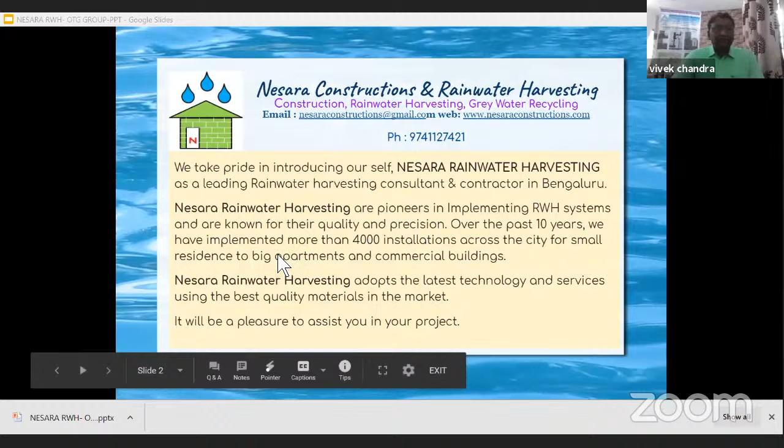So let me get on to today's topic. First, I would like to talk about the relevance of rainwater harvesting in an urban scenario. Why we need to do rainwater harvesting? As we all know, rainwater is the primary source of all secondary sources of water like river, lake, borewell, and municipal supply. Of late, people are using precious treated fresh water and groundwater for irrigation purpose, industrial purpose, and drinking purpose.

Because of this over-dependence on fresh water and over-exploitation of groundwater, day by day, the groundwater source is depleting and quality of water is deteriorating. For example, as we go for deeper borewells, the water contains salinity, fluoride, which is not suitable for potable purpose and irrigation. So fresh water sources are drying up fast as our requirements are outstripping our availability. This has increased the cost of water as well.

Many housing, office complexes, and industries are reeling under a lack of fresh water resources as borewells have dried up and municipal supply is not sufficient. And one more major cause is increasing concretization, reduction in green cover in urban areas, and polluting the natural water bodies are creating more surface rainwater.

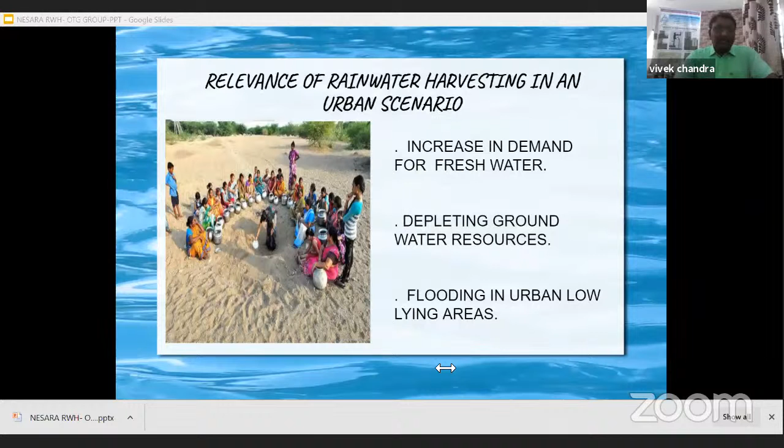So let me get on to the benefits of rainwater harvesting. The first and foremost benefit is rainwater is free. The only cost incurred is for collection and reuse, thereby reducing the utility bills. It is a decentralized source, unlike your supply water or borewell water where government agencies collect taxes. Rainwater is a sustainable resource. We will be less dependent on supply water and groundwater in case of harvesting the rainwater.

And rainwater is free of hardness. This helps in reducing the scaling and need of a softener. It has a nearly neutral pH. And rainwater is superior for landscape irrigation as well as bathing purpose. By harvesting rainwater, we are reducing the flow to stormwater drain, which avoids unnecessary flooding.

Rainwater harvesting through groundwater recharging increases the water table and gives saturated soil condition for the plants and trees in the surrounding. There is no valid myth involved in using rainwater for domestic potable purpose. It can be very much used for all purpose like any other water source with necessary precautions.

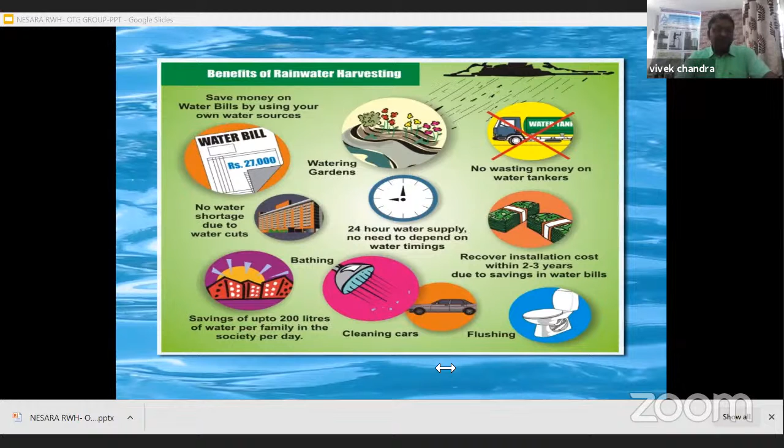So let's go on to the types of rainwater harvesting. Broadly, we can have 4 types of rainwater harvesting, even though many experts do harvest the rainwater in different ways. So the first and foremost is rainwater harvesting for reutilization. This is from rooftop, wherein rainwater falling on the building rooftop can be collected and reused.

The second one is rooftop rainwater harvesting for direct recharging of borewell. Here, the rainwater falling on the rooftop is collected, filtered, and injected to the borewell casing pipe with certain conditions. These 2 types are most adaptable and more beneficial for urban areas.

The third one is groundwater recharging, which can be a good option for surface runoff and can be done in a community environment. And the fourth one is surface runoff rainwater recharging the deeper aquifer by the injection well method. This is a highly technical method of harvesting the deeper aquifer, the injection well method. We will not be dealing with that in this session.

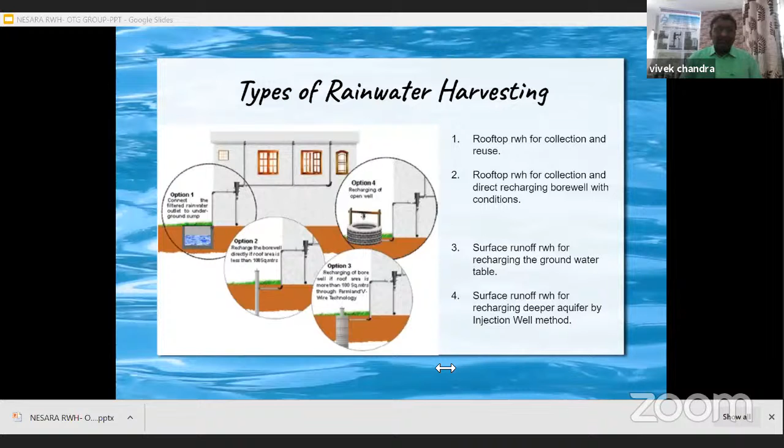So let's come to the first and most prioritized option of rainwater harvesting, which is rooftop rainwater harvesting. The concept is to collect all the rainwater falling on rooftop, which is your catchment area, wherein the existing rainwater outlets from rooftop are interconnected and drawn to an appropriate position close to your collection point. Here, filters are used to remove the dust particles from rainwater.

The filtered rainwater is then diverted to underground tanks or PVC tanks for reutilization, and any excess overflow is diverted for direct recharging of borewell or recharge pit based on availability. By doing this, dependence on other sources like borewell and supply water will reduce up to 20 to 30% during the rainy season. This whole system is gravity based. It is a one-time investment with no recurring cost for maintenance, reaping the benefits year on year.

In case of a clear open terrace, the filtered rainwater can be collected in the existing sump tank along with other supply water for direct usage. Many people have apprehension of putting the rainwater from their own building terrace in their own sump tank where they will be receiving municipal supply water. But I would like to say many people like me are using the rainwater after filtration along with the Kaveri water mixed together. There is no harm. But we need to take care about the cleanliness of the terrace in a certain way.

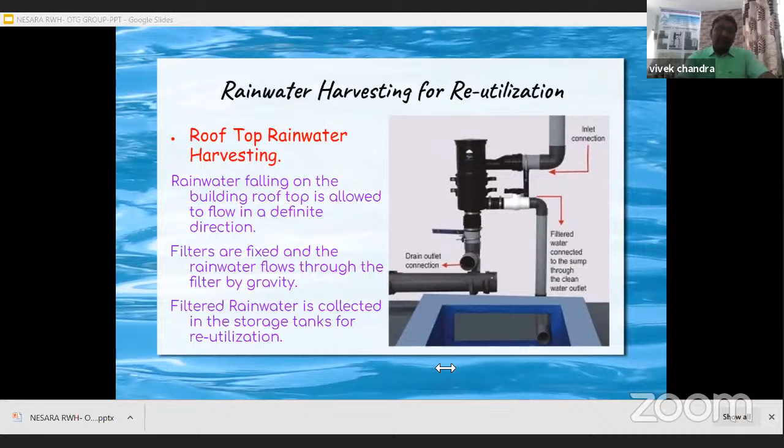In case of terrace gardening on rooftop, care should be taken regarding rainwater getting mixed up with soil or organic matter. In such a scenario, rainwater can still be collected in a dedicated storage like a PVC tank to be utilized for gardening and other cleaning purposes. The excess overflow can then be diverted to the groundwater recharging system. Or if there is a secondary filtration, even that water can also be utilized for potable purpose.

The second method is direct recharging of borewell. Very few experts like me will vouch for this direct recharging of borewell, because I have been practicing this for the past 12 years. I can say with confidence, with certain conditions applied, we can recharge the deeper aquifer of the borewell source. So this method is recommended only in case of a defunct borewell or a deeper borewell with a low yield capacity.

In case of a borewell depth lesser than 300 feet with a good yield, we don't recommend direct recharging of borewell. Here, the rainwater is filtered and allowed to percolate to deeper aquifer through the existing borewell casing pipe. The rainwater can be from rooftop or surface runoff water of the rainwater channels or gutters. The rainwater should be filtered properly by way of either rainy rooftop filters or V-wire vertical screen filters or through a filtration media with good maintenance before letting it into borewell casing pipe.

So care should be taken to the utmost that no bad water gets into the borewell source. In case of that, we will be polluting the entire source of the borewell, which might harm the source in the vicinity. The best practice is to allow the rainwater to settle in a tank before it is diverted to borewell casing pipe. The advantage of direct recharging is the soft filtered rainwater is added directly to the source of the borewell, which will have greater chance of retaining the water table and also reduces the hardness level of the borewell water.

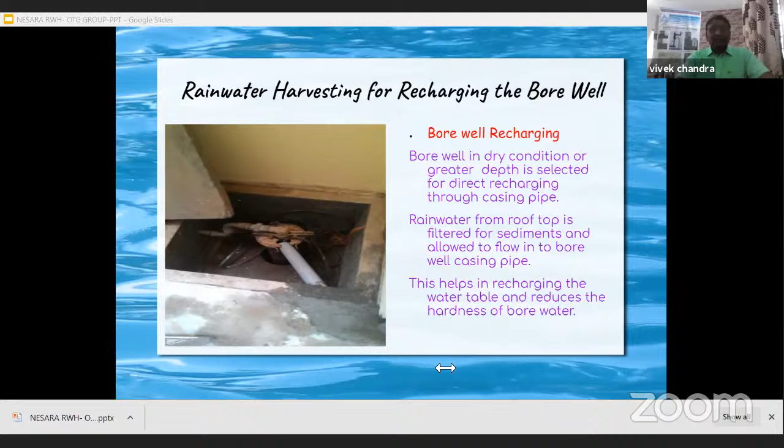So the third and most popular method is the groundwater recharging method, especially in initial days in Bangalore when the rainwater harvesting regulations were implemented by BWSSB. The entire concept is copied from the Chennai experience. Now our BWSSB people have realized that in Bangalore, groundwater recharging method is not giving results. So they have changed the regulations and they are giving importance to reusing the rainwater. For this, they suggest 6 liters storage capacity for every 1 square feet of roof area.

So let me explain briefly about the groundwater recharging method. In this method, rainwater from either rooftop or surface runoff channels will be channelized through a filtration media of various layers and allowed to percolate to ground by making recharge wells of suitable volume. Here, care should be taken to select the suitable place for this recharge well. It should be away from the building foundation line by at least 5 to 6 feet to avoid any possible seepage to the foundation. And it should be away from the sanitary drain system to avoid mixing up of good and bad water. The depth of the recharge well should be at least 10 feet.

It should ideally reach a soil condition like sandy loam strata for better percolation. So this is the main drawback of Bangalore. In many areas, we find hard rock strata within 10 feet depth. And the percolation rate of the rainwater is very, very less. And the saturation of the soil also reaches very fast within 1 or 2 years of recharging. So thereby, the rainwater gets stagnant in the pit, then overflows through the recharge well. So that is why we discourage this in urban areas where the plot size or the building size is very small. This is advisable only in case of a large open area where a large open surface runoff water is available. The size of the recharge well is also decided as per the catchment area.

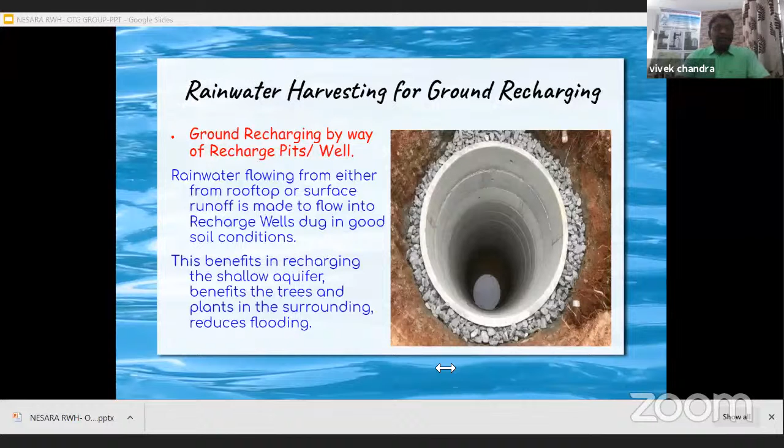Typically, the rainwater is made to flow through various size void structures to trap different size suspended particles. At the bottom of the filtration chamber, the pipe is connected to the main recharge well. The biggest advantage of this method will be avoiding urban flooding situations and soil erosion.

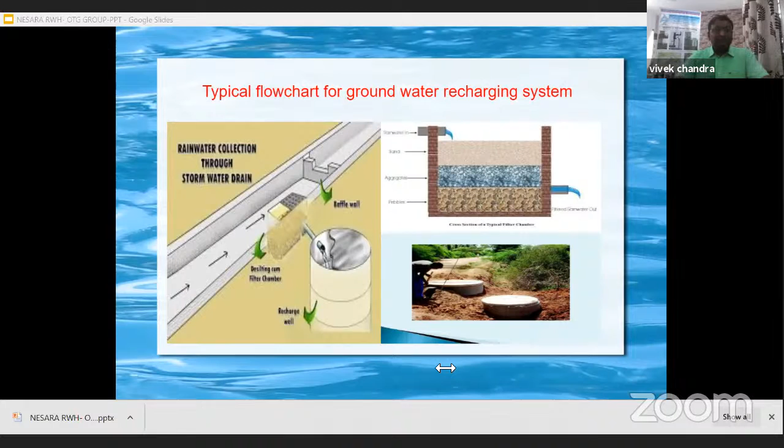Now, let's come back and take a case study of a simple urban dwelling unit, how we can plan for a rainwater harvesting system in a plot size of 30 by 40. So I've considered a site dimension of 1,200 square feet, where the supply water is either from municipal or borewell, or if both are not there, they are dependent on tanker water. This is only an example.

So they have an existing storage tank of 6,000 liters, and they have a borewell also, which is yielding on and off. When I say yielding on and off, it yields in the rainy season and has low yield in the summer season. It has a depth of 950 feet. So when we calculate the demand of water for two houses of 4 persons each at the rate of 150 liters per head per day, the dwelling needs 1,200 liters per day consumption.

So I have considered the average rainfall of that particular region as 1,000 millimeter, as is the case for Bangalore also. So when we come to the calculation of the rainwater collected here, the average rainwater which can be collected every year is 77,400 liters for an average rainfall of 1,000 millimeter. In case of Bangalore, for the past 5 to 6 years, it has rained more than 1,100 millimeter. And this year, as we all know, we have already received 20% more than the annual average.

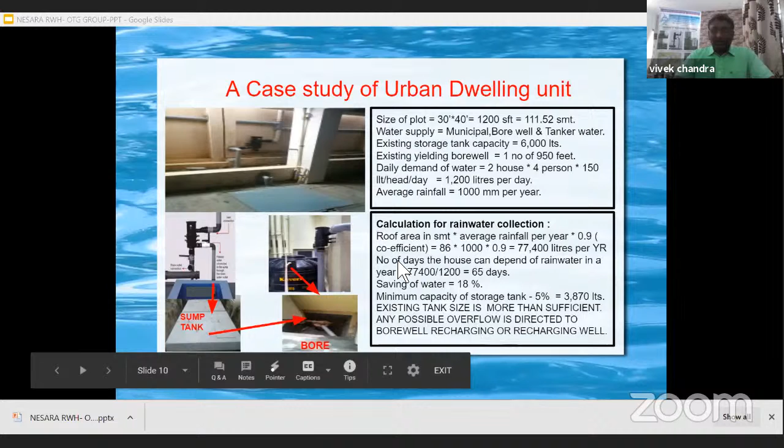Do we have time, sir? Can I go ahead?

So when we come to rainwater harvesting for farmland and open large areas, in our country we are mainly dependent on rain-fed irrigation systems. The canal irrigation system is becoming increasingly overburdened as more land is covered for cultivation. Availability of power and borewell technology has created exploitation of groundwater

Go ahead, Vivek, no problem. Yeah, thank you, sir.

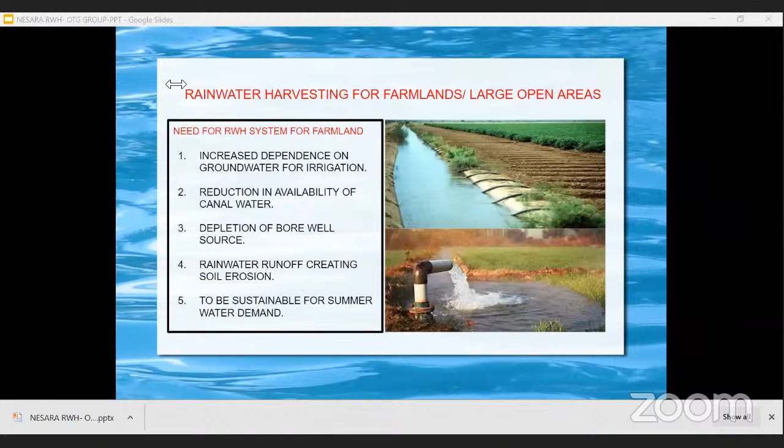sources without accountability. Only 1 or 2 borewells survive out of 10 borewells drilled. Nobody knows how many borewells failed before a successful borewell yields water. Only when you ask a farmer how much he has spent on the borewell, he will tell 15 lakhs, 20 lakhs. We will be wondering why he spent so much. But behind one successful borewell, he would have drilled at least 5 to 6 failed borewells. This is the present scenario now.

And borewell depths are also going deeper year on year, as only 20% of the rainfall is absorbed by the ground. The remaining 80% is being wasted as runoff and is also creating soil erosion of the top fertile soil.

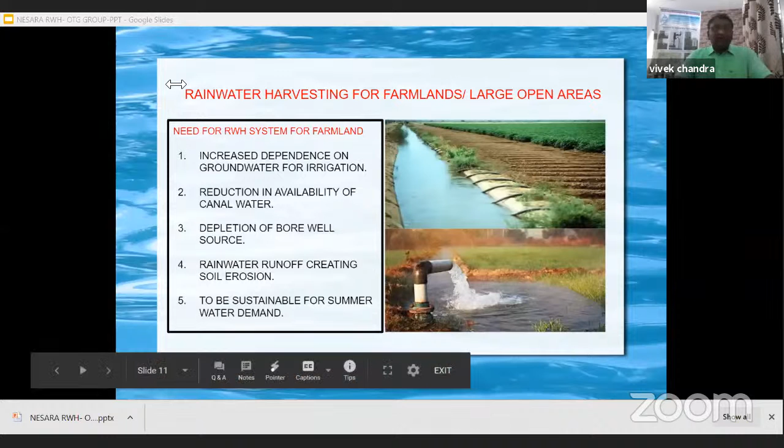So let's come to a typical rainwater harvesting system for farmland, a large open area. Here we have considered 1 acre of land for calculation purposes. The first thing we need to do is a topographic survey to understand the terrain of the land.

At downstream, we need to make provision for an open well to collect surface runoff water. The water first enters the silt trap to remove solid matter, and clear water flows into the open well. Apart from this, to prevent water flowing out of the land in case of heavy rain, especially on sloped land, trenches can be made at periodic intervals to slow down the flow and make it percolate into the ground. This also helps avoid soil erosion to a great extent.

Recharge wells can also be considered at suitable places to percolate stagnant water. In some lands, there are multiple low-lying areas. In such cases, recharge wells can be made in a smaller way, even if a bigger recharge well isn't feasible. The idea is that whatever rainwater falls on our land, even a single drop, should not escape the boundary wall. Everything has to be absorbed and percolated into the ground.

In case of a bore well near an open well, the overflow from the open well can be diverted to the bore well casing pipe for direct recharging. This is subject to certain conditions like depth and formation of the bore well. Alternatively, another system called an injection well can be adopted near the bore well to inject rainwater into a deeper aquifer.

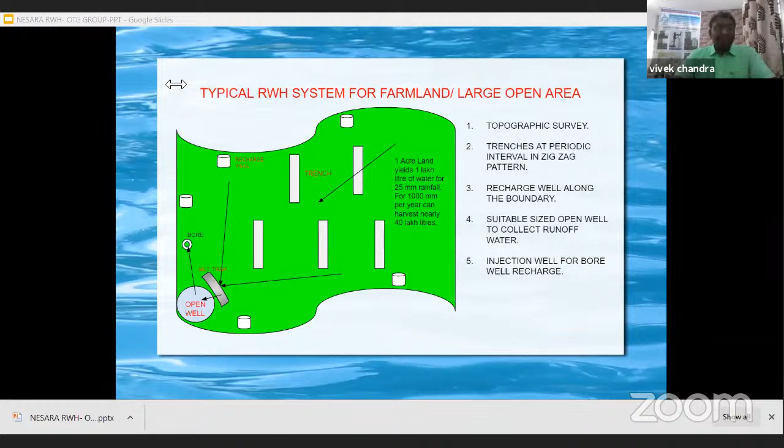I will briefly explain the concept behind the injection well method. The suitable place is located at a distance of 15 to 20 feet near the existing bore well. Using the electrical sounding method, the first permeable zone is located, usually at a depth of 30 to 50 meters. An 8.5 inch drill is made up to this depth.

10 mm crushed stones are placed inside the bore for a depth of 5 meters. Then a black HDPE pipe with 8 mm holes drilled in a zigzag pattern, fixed with a unique V-wire screen filter at both ends, is lowered inside the bore, leaving at least 5 meters on top. After this, 10 mm crushed stone is again packed around the HDPE pipe to fill the bore.

The top 5 meters forms a storage well created to hold about 5,000 liters, where the bottom of the well should be below the top V-wire screen. Right at the top level, filtration media of crushed stones, sand, and activated carbon is placed.

Rainwater from the catchment area is diverted to a silt trap first, where the bigger dust particles are filtered. The silt trap is basically a chamber of 1 meter cube with a mesh filter and crushed stone at the bottom, so bigger dust particles get settled before entering the actual filtration media.

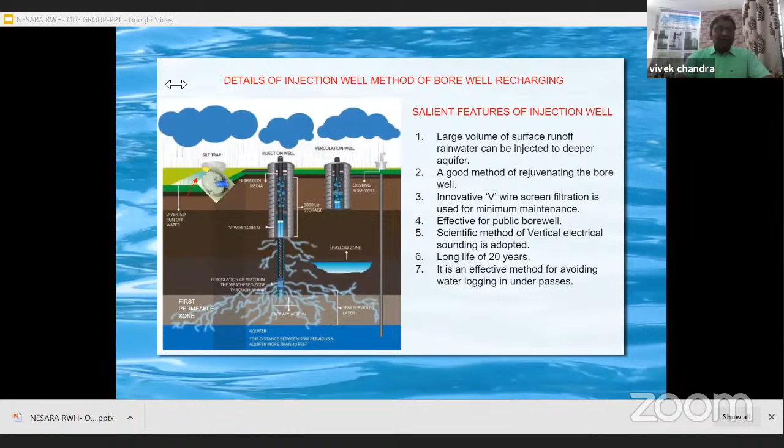So to conclude, we all know that holistically there are 3 R's which predominantly people use: reduce, recycle, and reuse. I would like to add one more R to that: recharge.

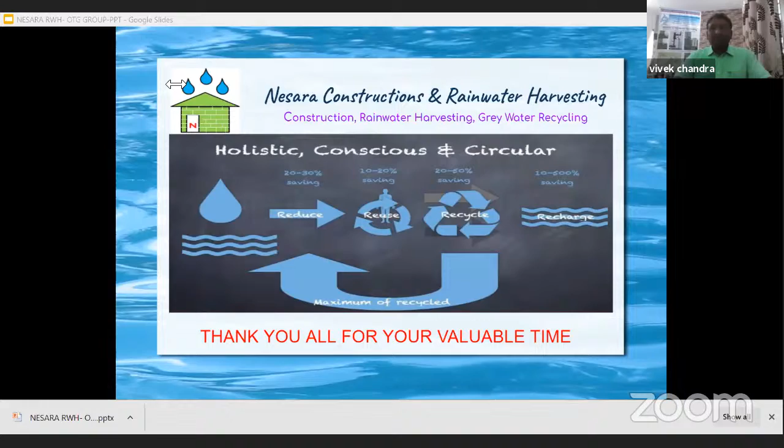Vivek, you are not in a hurry, no? You can be there till the end of the session, no? Yes sir, I'll be there. Okay, there are a few queries people are asking, but I think they are related to your session as well as Harsha's session, so we will have this at the end of the episode session. Sure sir, that we will make it, so that way it makes sense also. And thank you very much—you have probably provided Harsha enough time to explain in a better manner. Otherwise, if the first speaker takes more time, the second speaker will always be in a hurry. So over to Harsha.

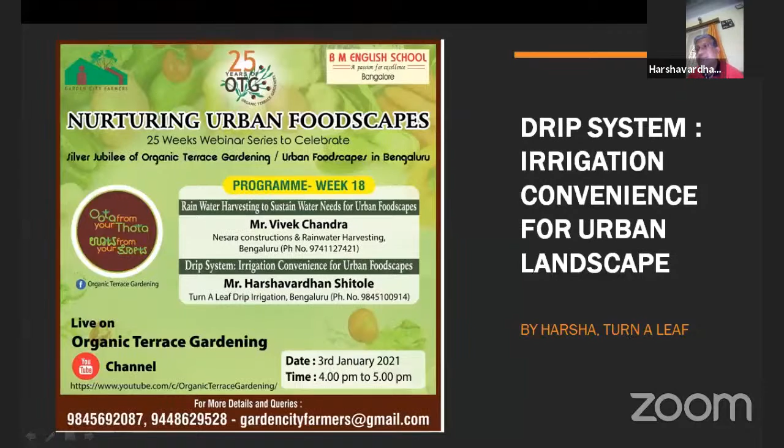So, okay, again quickly, why to set up a drip system in urban landscape.

We all grow our own greens, we enjoy growing veggies wherever we get the space, terraces, balconies, or whatever farm we have, right? And watering is the most regular activity one has to perform. And to perform this watering activity in a better way, it gives a better yield if we do it on a consistent basis.

In our busy schedule, it's really challenging at times, especially for people who are working, to water regularly, or especially if we have many pots or a large backyard or a farm, it takes a lot of time, right? As compared to all other activities like fertilizer management or pest management, watering takes a lot of time, 30 to 40 minutes a day.

I know a lot of people enjoy watering, holding them, but I feel instead of that, they should enjoy the overall gardening experience and let the technology, the tool, the automation do the same job, what allows them to do, right? So they have the option, for the people who are like that, they have this option, right?

Especially when someone has a traveling job like I also used to have, then I end up killing all the plants, or pushing all my responsibility of watering to someone else. And that family member may not be knowledgeable, or he's not that keen or interested in learning the watering techniques, which I'll be talking about next, on how to water the plants properly, right? And then they will also end up killing the plants, or we are unnecessarily forcing them to do something they don't like to do, right?

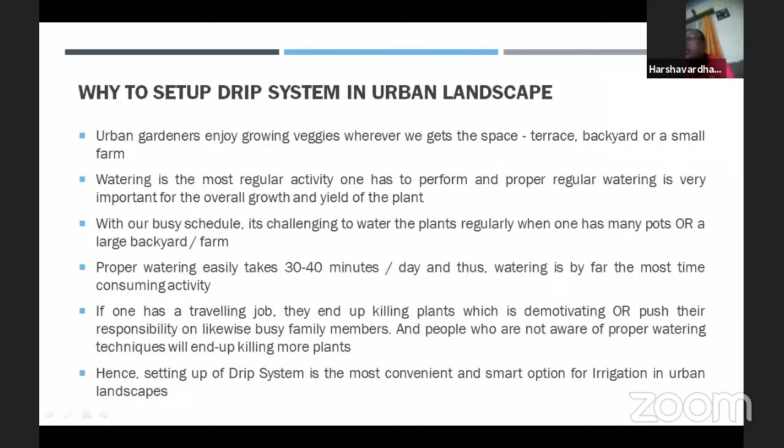So at the end, setting up a drip is the most convenient and smart irrigation option for urban landscapes, right? Now quickly, all of us are experts into that, but I'm just going to touch base on most of these basics of watering, especially why it is important to set up while setting up the drip system, right?

So roots need the water, not the leaves or stem. At times when I was new, I used to water the entire plant, and it used to attract a lot of pests or mealybugs, and some plants from the cucumber family also used to get a lot of fungus building because of this additional moisture. So only the roots need the water, not the entire plant.

And one of the basics is, plants need moisture, basically 50% air and 50% water. They just don't need 100% water. The roots also have to breathe.

Typically, the way I used to water using my hose pipe with full force from somewhere far, spraying on them, that used to build additional pressure on them, or used to take out the topsoil from the plants, right? So both of these are not good, they should be avoided. Also, when I was new, I used to water at the center of the plant, where the main stem is coming out.

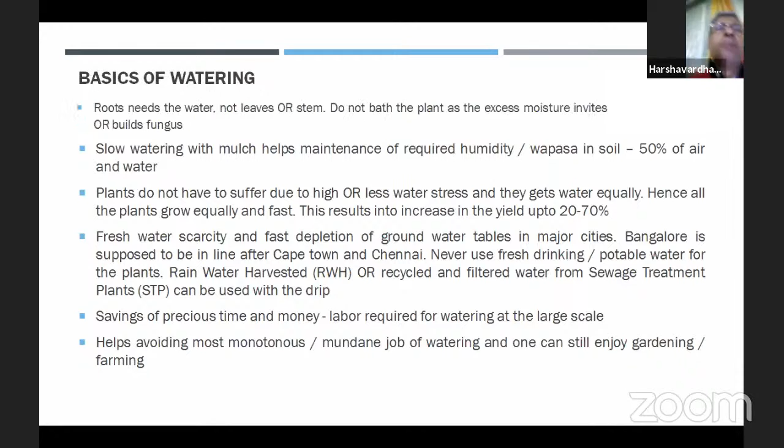It's also not that bad actually, and it has been filtered many times, but we have set up many systems on such waters, either on the landscapes of apartments or individual houses. So one should use STP water or rainwater harvesting for the drip system.

Obviously the advantage of this system is saving precious time. Somebody who's very busy can just switch on the pipe, and after a few minutes switch it off, or set up an automated controller, so they don't have to spend that much time. In case of large landscapes, they don't have to put in additional labor for watering, and that's how time and money is saved due to the drip system. For a techie like me, I'd love that, and enjoy the output, rather than the monotonous, mundane job of watering, which is very time consuming.

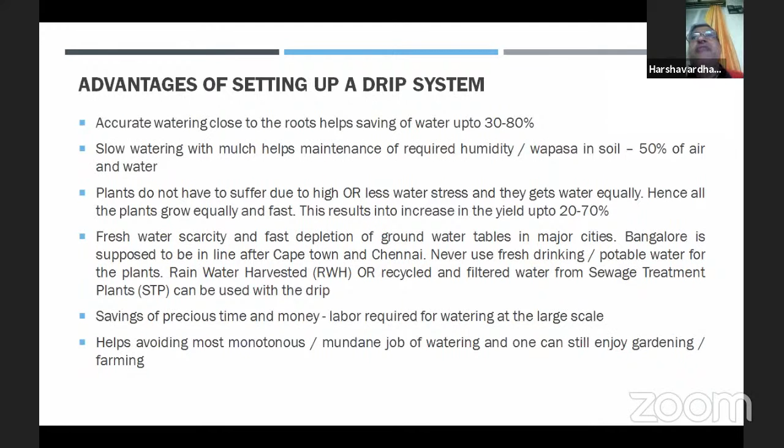So those are the advantages of drip. Now, how can one set up a drip system in their OTGs or landscape? This is very high level, I'm going to explain.

We have to identify the water source, the taps available, and how much is the water discharge, meaning the pressure of the water. The easiest way to find that out is to take a bucket, let the water run, and use a stopwatch to find out how much time is taken to fill that bucket of known capacity, say 15 liter or 25 liter. So we have to find out how many liters per hour is the water discharge from that source.

Once we find that, we have to identify the water requirement for each plant. It depends on the type of plant, the size of the pot, and the kind of soil being used. All three factors are important for understanding that. Most of us with OTGs already know this well, so I'm not going to spend time explaining it since it's a big topic.

Once we know that, we have to find out, in a particular section, how many total pots are there and what their water requirement is, again calculated in terms of liters per hour. We have to make sections, and fit a pump which will give the appropriate pressure for that section.

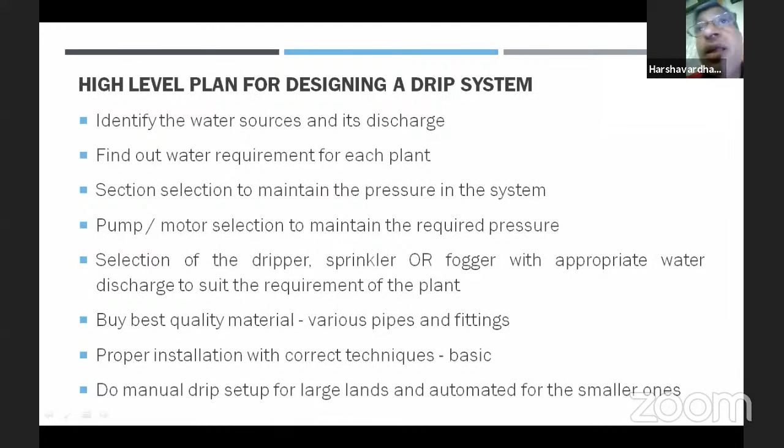You can get one for 600-900 rupees, or you can spend 3,000-4,000 rupees and get a controller which can handle multiple sections. Okay, so this is the high-level design I could think of.

Some of the tips as professionals: because I was working on various projects and was not having time, I got, through a friend, somebody who's an expert in drip, and learned some of these techniques. And as gratitude towards him, I have helped him with a lot of leads and setting up the drip, especially working on the automation part, because I'm also a techie. And in most of the projects I handle, I set up the automation system.

So as I said earlier, setting up a drip is pretty straightforward. You can see various YouTube videos and all these fittings, so go ahead and do that. But some of the tips we have to give: one must arrange all the pots and fix the layout first. Find pots of similar sizes, similar soil types, similar types. Put all your succulents and cactus in one place as much as possible, right?

Finalize this layout first before setting up a drip, because I see a lot of people make these mistakes. They start setting up wherever the plants are, and then it becomes very difficult for the system to work. Or if they make a lot of changes afterwards, there is a lot of rework which can be avoided, right? As I said, use quality material, ISI branded UV protected pipes.

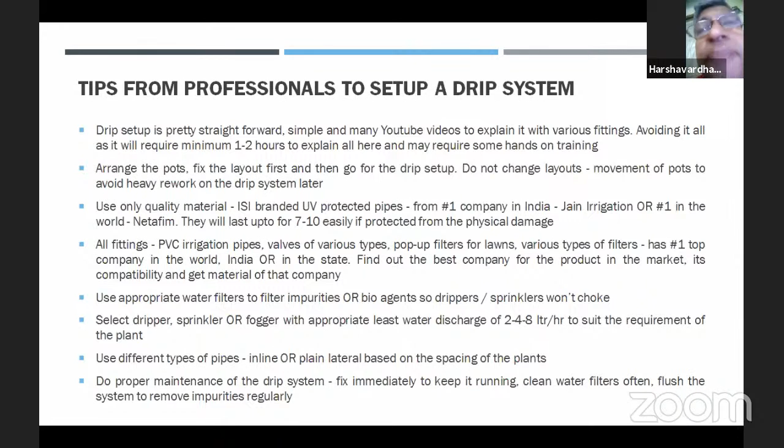Some of the challenges I found while setting up drip systems in OTGs. Remember all the watering techniques I told you. While setting up the drip system, ensure most or all of those are catered for, as I already explained. Keep pots of the same size or same type together, right?

Many times there are these fancy sprinklers and foggers. They look good and feel very good, but they have very high discharge. The minimum I found was 32 liters per hour, and the radius is very long, 2 to 3 feet. Not only that, they need very high pressure to operate, so you need a pump or motor to run many at a time. One can use a maximum of 30 with a half or 1 HP pump. Whereas with drippers you can have 100, 150, 200 pots using the simple pressure of your normal pipe, if you have an overhead water tank in your apartment or building. So understand all of this before starting.

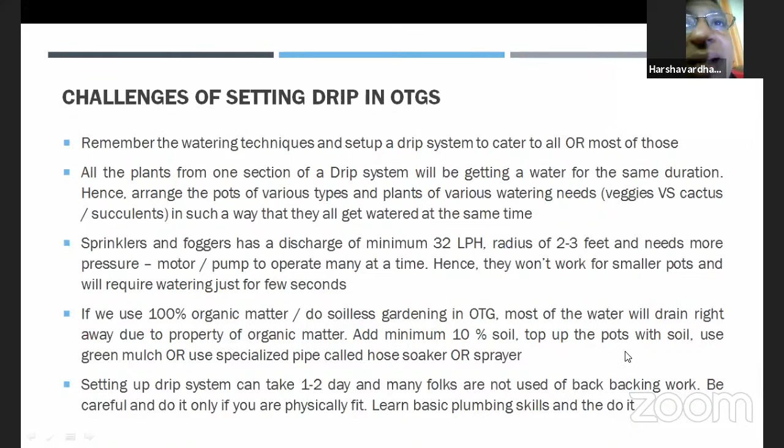And finally, setting up a drip system can easily take 1 or 2 days, and many normal urban folks are not used to any physical laborious work, and at times it's back-breaking. I came across a couple of occasions, like when I had to shift my OTG after shifting my house, and with all excitement I was shifting all my pots. And I was left with hand pain for more than 6 months, so I highly recommend that you be very careful. Only if you're physically fit, do the continuous drip setup, or take some time and casually set it up, learn some basic plumbing skills and do it, and don't make a lot of mistakes that way, right?

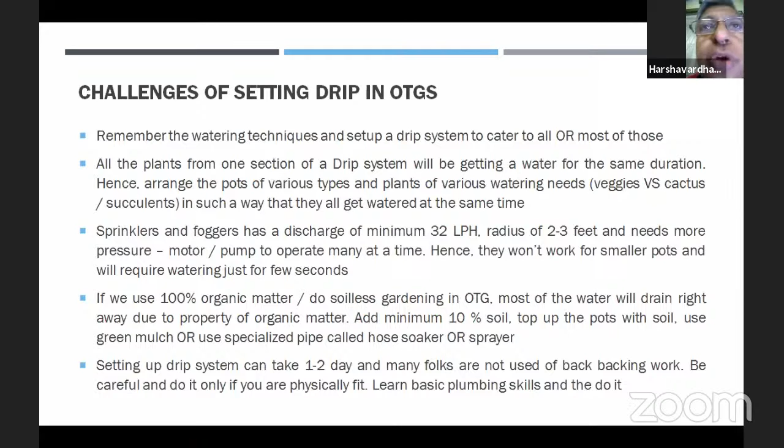Again, a few common mistakes one can really avoid. What we found is most of the drip kits available, which are not from any brand, never mention whether they are ISI or not. And most of these non-ISI, non-branded pipes are made from recycled plastic. It's good to use recycled plastic, but when we lay the pipes on the ground under UV solar rays, they are not going to last more than 1 or 2 years, and then they will all break into microplastic, which is so dangerous. We have all learned to avoid simple plastic like milk packets, and now here we are creating a major disaster.

So please don't buy any non-ISI branded pipes from the market. When you go to the market, the only pipes they sell are non-branded ones. The companies I told you about only have large distributors, and none of the smaller shops in popular large markets like KR market sell any branded stuff. You have to go to a distributor and unfortunately buy in large quantities, right? And that's one of the reasons why I had to set up a company. Otherwise they were selling me only 300-400 meter bundles.

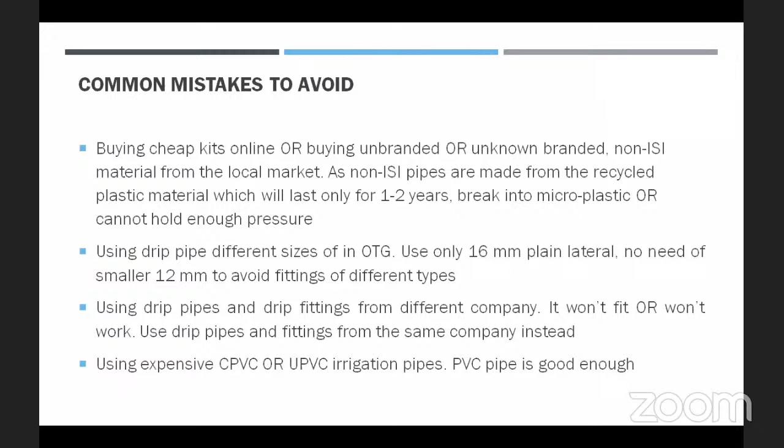Wow, pin drop silence. Sir, questions tagoltira? Anil tagoltira Hegde sir? Yeah, see, Anil will take. We are ready to take, sir.

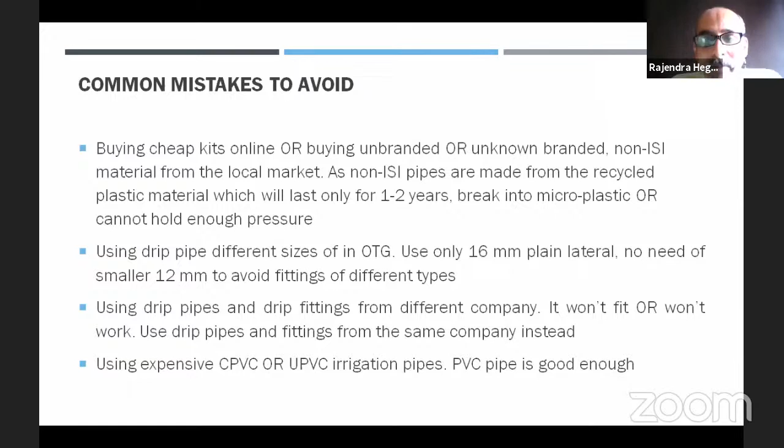A few questions, Vivek, on YouTube as well as here on the chat box. Sure, sir.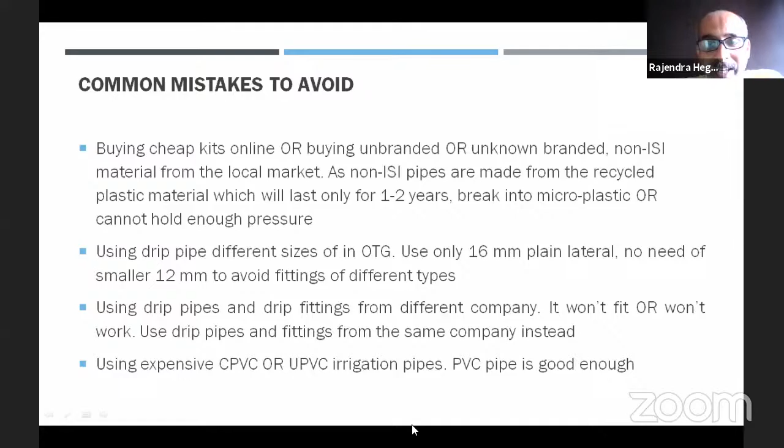Rainwater harvesting in big apartments. See, we are all staying in quite big apartments, Vivek, you know. And what are the options in... let me just put all the questions so that you can answer together. They are all almost related. Sure, sir. And the cost estimates, very roughly, based on all your experiences that you can tell. And what percentage of area or rain to be harvested for a normal household? How much area, if it is there, is sufficient for them to collect.

You mentioned somewhere how many liters can be saved and what size of the tank and other things. Especially in BBMP area, whether it is practical to have some common area for rainwater harvesting. I think it is there in the chat box. Nataraj Upadhyay sir is also there already. Probably he can explain, because there can be a mix of water from the gutter and other places where it may not be very filtered water.

And whether rainwater can be used in dishwater. What I was told, Dr. Vishwanath always used to tell, rainwater is the purest water. So it can be used for bathing, cooking, and any other purposes. Compared to the other water, rainwater is the best water. Whatever, based on your experience, you can answer. And one or two questions that would ask Harsha. So you can take up these questions, Vivek.

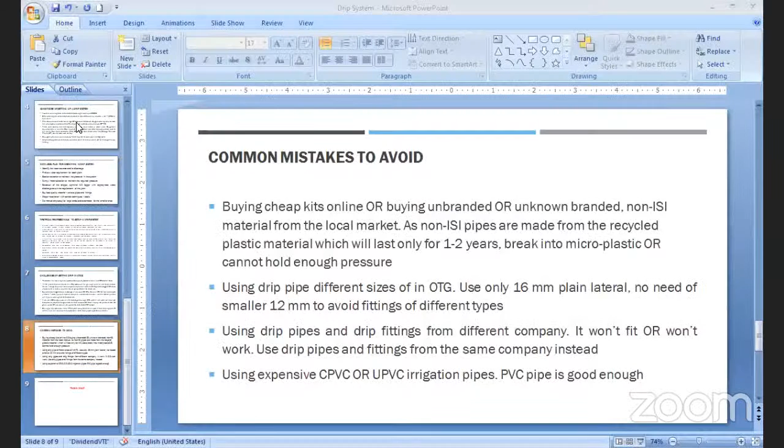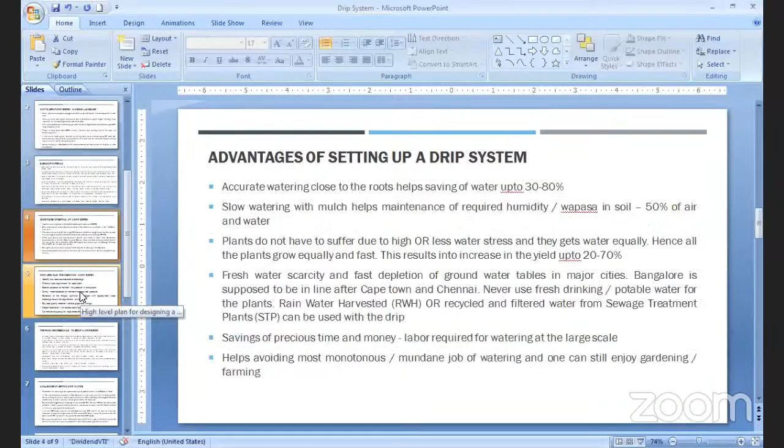So the first point which I covered, let me see if I'm able to share my PPT again. Here I was telling how to calculate the pressure, basics of watering. There is a method to calculate the source pressure and how much discharge we need. I explained how you can take a bucket, keep it under the tap, let it open and find out the discharge per second, and it needs to have proper pressure. If it is not happening, it's just because of that.

Is scaling a problem due to hard water? There's a pressure gauge also one can buy, and we need to maintain 2 kg pressure in the entire system. If you really need to go that sophisticated, you can buy that gauge and find it out yourself, because otherwise I don't know how to calculate the pressure without the pressure gauge.

Is there any particular height you would recommend for a tank, a minimum height? It's not only the height, but also the capacity of water in the tank. Both of them determine the pressure. I can have a tank at lower height, but with more water it will give me more pressure. So it can get very complicated, with a lot of mathematical formulas.

But in most of the places I have seen, I've never had to use the pump. So you really don't have to use the pump at all. Just give me a call, and over the phone I'll explain what the issue is. I'm not getting the issue otherwise. There is nothing else I can recommend.

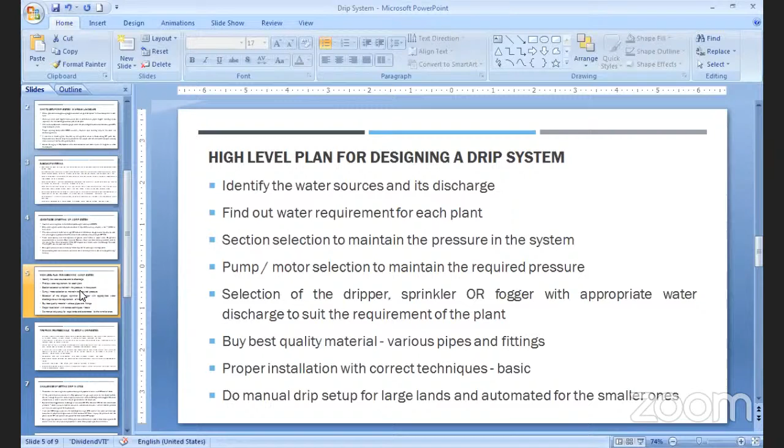Say many things, probably at least a simple thing is the pipe. People get online 2,000 rupee kits and set it up, and after 6 months to 1 year, they say it all gets choked up. At that cost, they probably cannot provide quality material. It is absolutely not possible. And none of the kits have a filter. Very simple, none of the kits have a filter. So most of them are non-ISI brand ones.

Okay, sorry, we will. And what is the water saving compared to, let's say, drip irrigation versus regular watering? What is the quantum of water being saved? Any numbers you can share there?

Actually, all those numbers are there for large lands and large scale things. Sometimes my heart goes out, people set up drip systems but let it run for so long, and there is so much water which gets drained. And that's what I was saying, you have to have all these considerations.

One of the simplest ways is to put a small plate below all the pots, so that the same water is not really lost, and it can be siphoned out and be helpful again. But for large scale, the water can be saved, as I said, up to 30 to 80%.

Good, so let's say you have 150 pots, and earlier you were using the bucket system for watering. So if you ask me, in our house we need about 1 liter of water per day for a pot of about 12 inches.

It depends on the growing medium and other things, at least 3 to 4 days in a week. So considering 4 liters per week per pot, whether drip irrigation helps, that's what probably they meant.

Can we save water, or does water requirement remain the same? It is only the convenience. At small scale, the water requirement will be almost the same. I don't think so, because in farms with flood irrigation, water gets lost in between plants, so there's a large saving there. But in urban foodscapes, using container gardening, the quantum of water required per square feet remains the same since we are not unnecessarily watering other areas. So water saving may not be the major reason for drip irrigation.